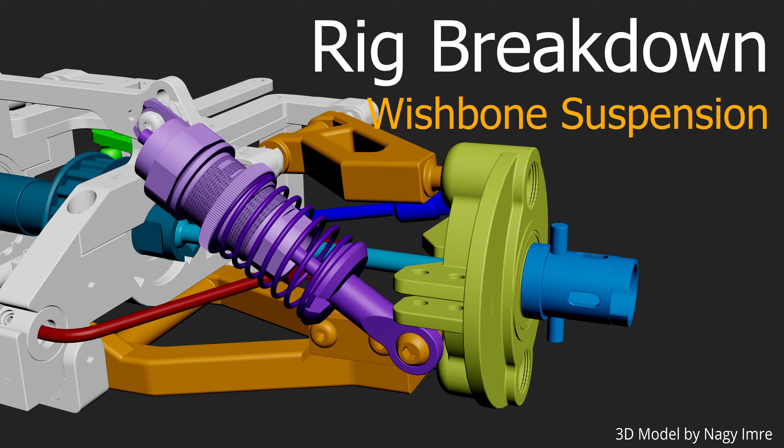Hello and welcome to the rig breakdown series, where we have an in-depth look at some of the rigs that I've made to hopefully help you guys on your way whilst rigging or sorting things out. Again, this is not a final rig, it's in no way perfect, but it hopefully shows you some of the approaches that I've used to get to the final result.

And again, there are different techniques available. If you want to use any of those, obviously be free to do so. This is just one of the approaches. There's always multiple approaches that lead to the same result or a slightly better result even. So yeah, take it with a grain of salt, but this is just my approach, and I hope it helps you.

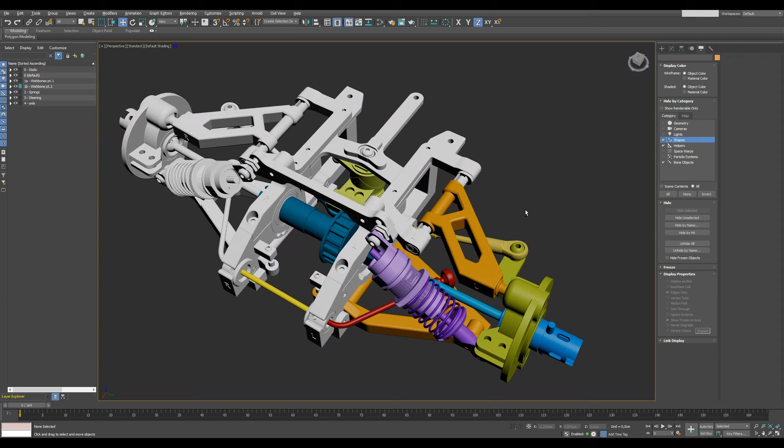So if you look at the whole system, we have a lot of stuff in white here. Those are the static parts. It is obviously the same left and right, and I'll just focus on the left side here, the part with the colors. The other side is the same. Feel free to copy that over and complete the rig if you want. But just for today, we'll be looking at the colored parts on the left side. So let's go ahead and hide the static parts. And you can see we've got a couple of categories that we'll be working our way through today.

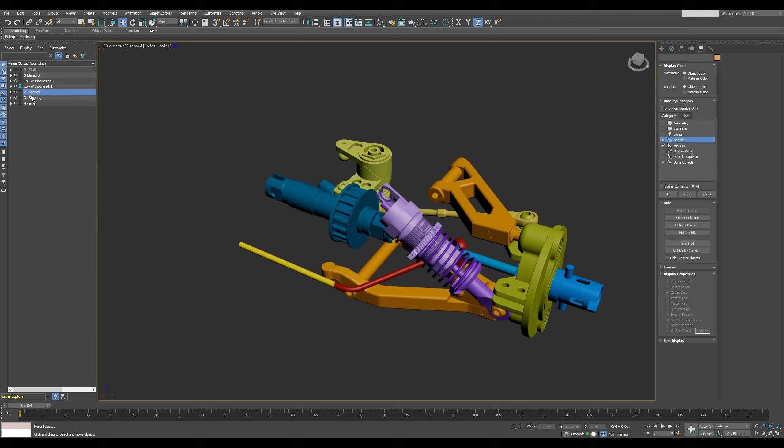And we'll start with the wishbone. There's a second part to it. We've got the spring, that's the purple area here. The steering obviously is something that we'll look at. That's these parts here. And last but not least, the axle, which has a universal joint in there. So let's hide the rest and focus on the wishbone setup that we have here. Let's show some of the shapes and helpers that we've used. Yeah, so this is it.

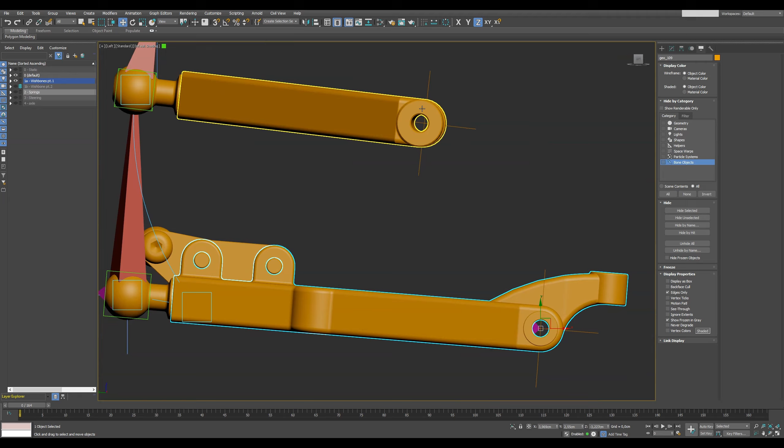If we look at it, one thing to note right off the bat is that if you see those wishbone setups, they are often not aligned with each other. Meaning that if we go to the left view and we look here, fully aligned, but this one is slightly offset. So if you want to rotate them with a simple bone setup, it wouldn't work. Or I mean, it would work, but it's not super precise. It would wobble a little bit. Again, this might be okay for you, but I just wanted to go with a really precise setup that works in all situations. So that's why I've chosen this approach.

Also, you can see that they're offset from each other a little bit. They're not straight. You can see this bone here is angled a little bit, so they're not actually 100% aligned with each other. So that adds to the complexity, I would say. So how did we do it? Let's hide the geometry. We've got one bone here. This is the control object that's just linked to this dummy here, and that just follows along. So that's a simple rotation on this axis.

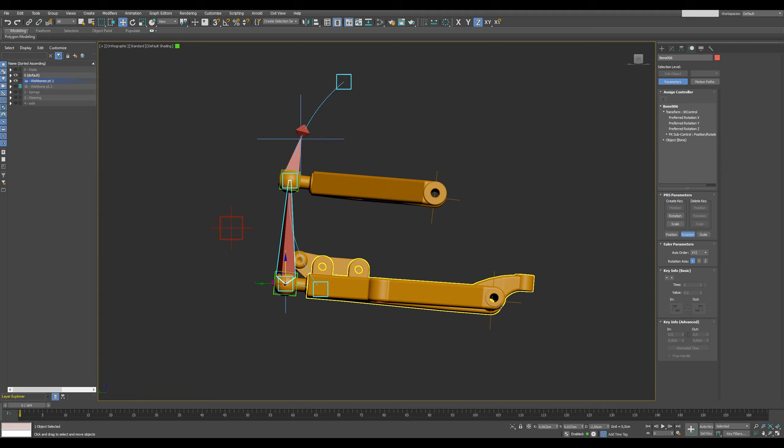And then the top part, let's unhide the geometry. The top part is also rotating on this local axis, but this has a look at constraint, sorry, not a target. And it's looking at the bones here. Now these bones are used because of the angled path here, but also because of the slight difference between the angle of these wishbone parts, which is the reason why I've drawn this circle. And this circle aligns with the center point of the top wishbone. So if we look at that rotating, you can see that it follows that arc perfectly.

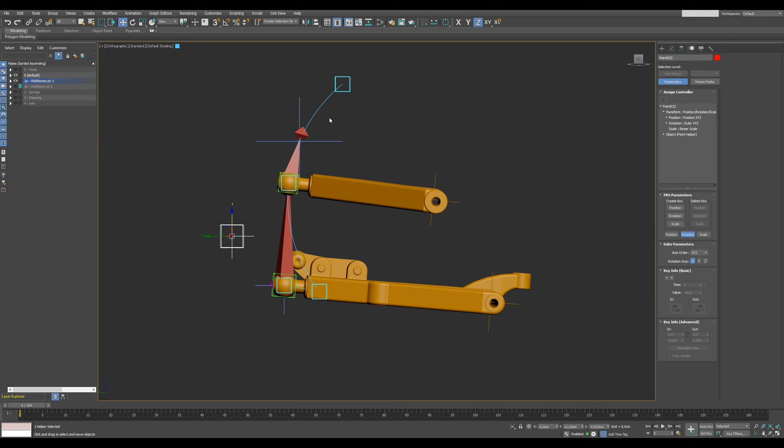And these are mounted within the chassis, so they wouldn't move, they would only rotate along their local axis. And the reason I went with the path constraint is because bones sometimes wobble a little bit and it's not super precise, like I said. So if you just draw the path, you can see I've fudged a little bit here with the angle, but that's all good. The bone doesn't really get that far, so it's never on that point unless you really skew it. You can see here. But yeah, the suspension would never go this deep. You can see that it kind of breaks the rig.

But if it stays along this axis or this path, it's fine, and it moves perfectly along each local axis. And that's very important, to not have that wobble in there, which you would otherwise have. So a fairly straightforward setup.

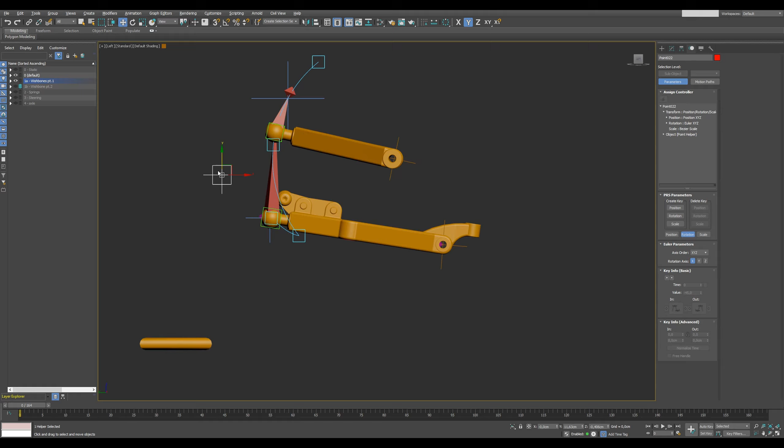One bone attached at the bottom, then a second set attached to the spline here, and if you move it along, then the top one just follows that path and the bottom one just rotates on its local axis. That's it. And then there's part 2, which is this one here.

Now this is a sort of stabilizer rod which works by twisting it, and that's why I've cut it into separate parts. Let me unhide the static. This is all one part normally. And it's probably a torsion bar of some kind, but since we only rig the left side, let's just focus on this.

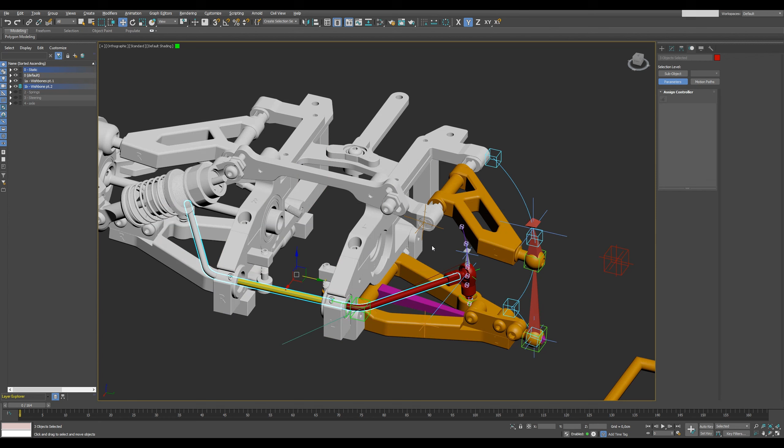Let's hide the static parts, but we don't really have torsion. So for practical reasons, I've just cut it up here, and we're only focusing on the red areas here. Let's hide the first part here. So this moves up and down. Actually, let's show that because we need this control object. So how did I do this one?

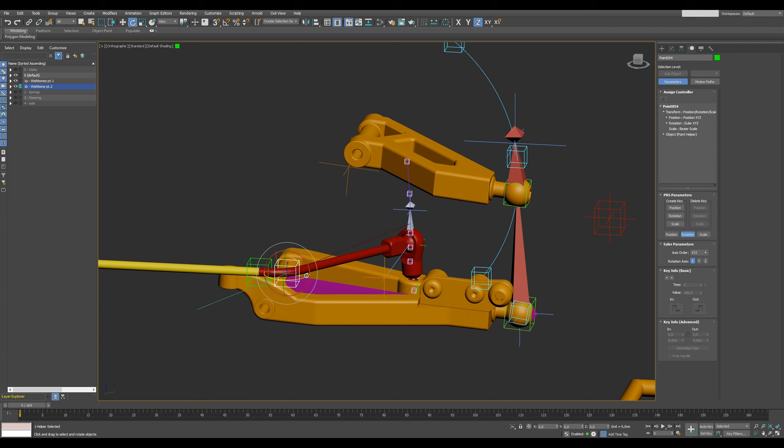Same setup. Basically, you have the arc here, which is the arc that this rod will move through when it rotates, and the rotation that it'll do is actually this one. It's all linked to each other, of course. Sorry. Let's just animate that for ease of use. Up. There we go. So now that's animated, and we can hide this part.

So again, you have this setup here. Let's hide the geometry, and you have a set of bones following along a path. Now this path is the center point of the rod here, and the rod itself rotates over the center point of this yellow one, which is obviously the same as this one.

So it's all aligned here in space. That is this point here. So this is the rotational point, and this circle here describes what the arc would be of the red areas following this path. I hope that makes sense.

So how we've done it, we have this one linked to the Wishbone part 1. That is this one here. So that's just linked to the pink or purple bone, however you want to call it. So that gets pushed upwards and it follows along this path. And this one is just a look at target, looking at the bone. Yeah, there you go. And that just describes a rotation along its local y-axis.

So that whole thing here, the whole red part, the top part at least, is linked to this look at target. So if that goes up and down, that moves along, and the rest is linked obviously to this bottom bone, so that you can see that it rotates slightly here based on the local axis. Not sure if that shows properly.

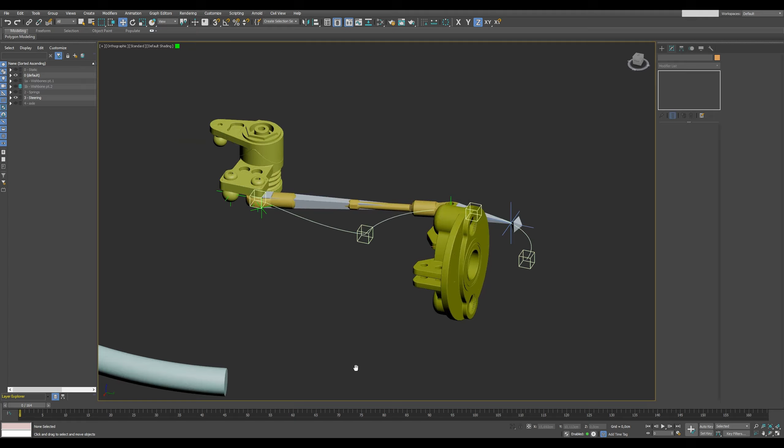Then the steering part, again, we're using spline IK here. I have linked it to this part that you can move around. Doesn't really matter, but you might as well rotate this point here. It's the same.

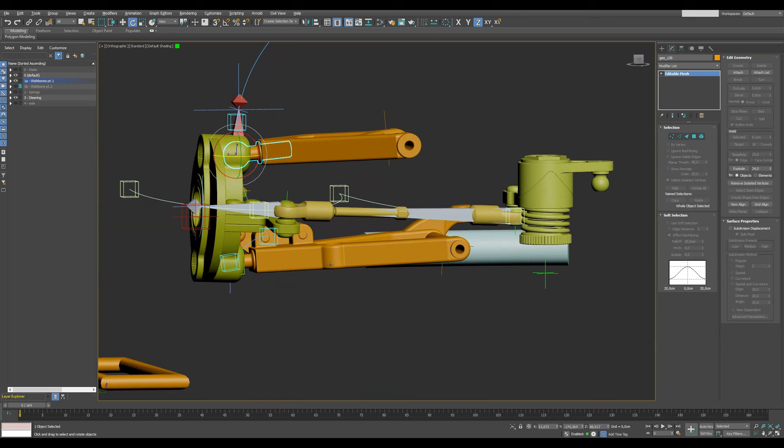But we're using the same spline IK, and the reason why we do this, if we unhide the wishbone setup, is again because these things are not straight. They're not centered. You can see the whole thing angled here. But if this moves up, then the steering obviously needs to follow. So if this goes up, we've animated that.

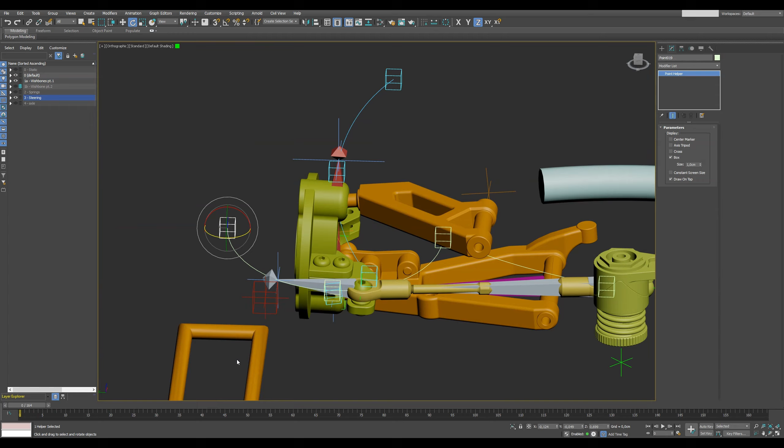So there we go. This arm of the steering needs to follow, and the suspension is leading and the steering follows. It's not vice versa. It wouldn't work. So if the suspension goes up, the steering just follows that, and you can see that the path, these points, are linked to the height difference or to the animation of the wishbone, so that just moves up and down along with it.

Let's hide this. So for looking at this, the setup is the same. You've got your same spline IK, you've got your bones that follow along the path, and if we are actually doing some steering actions, let's animate that as well. Let's say from 30 to 50-ish. Rotate this one. There you go. It's a bit extreme, but it'll work. So even though the height difference has now changed, it still works.

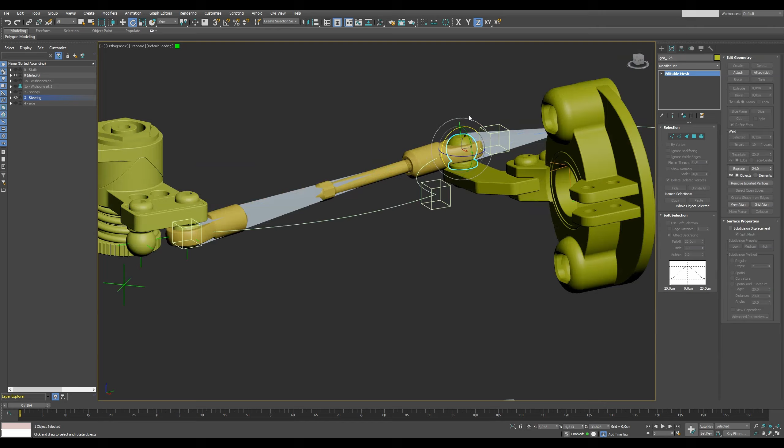And you can see that this one slides along the ball joint here. And the same thing on the bottom side. If we show it from the other side here, you have another ball joint here. Sorry, that was the one we're looking at. You've got another one here. So these are just simple bones, simple spline IK setup. The trick is to, again, draw that arc, that this part, again, attached to this ball joint and the one here in the bottom, that is rotating around. So again, that's not a vertical setup, it's slightly angled.

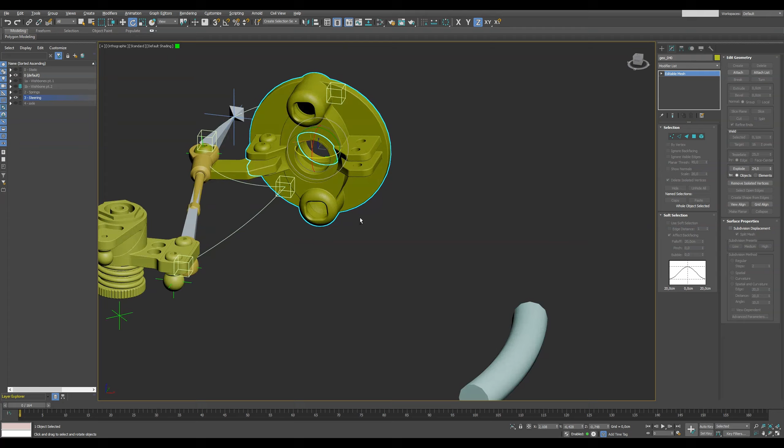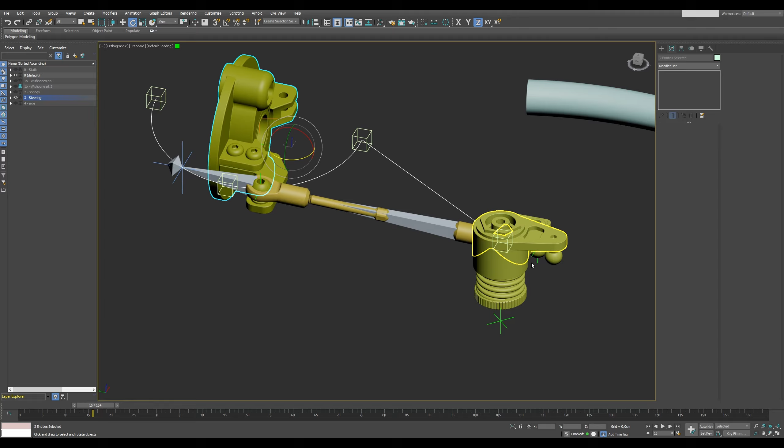So what you want to do is your path that this rotates around should have the same alignment. It's not a horizontal one, it has a slight alignment. So when it rotates, it follows this path perfectly. And that's what you want to repeat in the setup pretty much everywhere. So even though it's angled, even though it's all rotated a little bit, if you have this setup done, then you cannot go wrong because the path is always the same. It always rotates around these 2 points. So yeah, straightforward setup. This one just rotates along with it. Obviously, not a really complex one. Just like that.

Let's move to the final parts. The axle. The axle is basically a universal joint. You've got the leading one here. That's your wheel that you want to animate. You can see I've animated it. And following the tutorials that you can find on the basic rigging series that I have on my channel, you can easily animate this so that it still works even though these axes move.

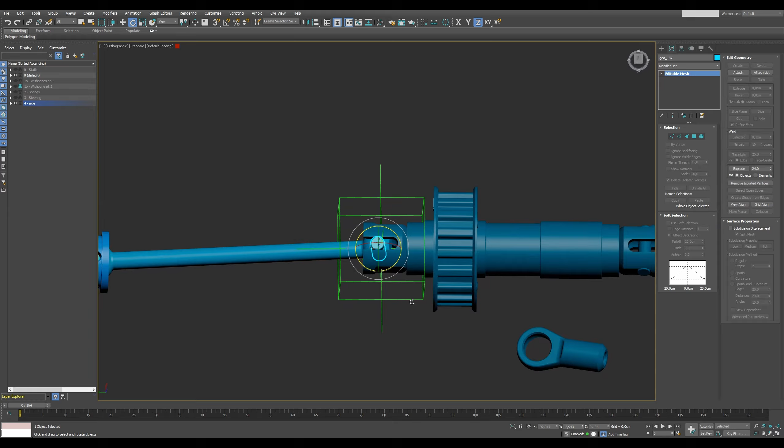It's a double universal joint in principle. So if you use this one, then this part would be your normal, your middle part that you would link with look at targets, etc. This will be your end result, but again, your end result here is your input for the second one. This would be your middle part, and then this would be your output part. So there's a bunch of dummies involved with it, but it's a fairly simple, straightforward setup that gives you the rotation of the axis.

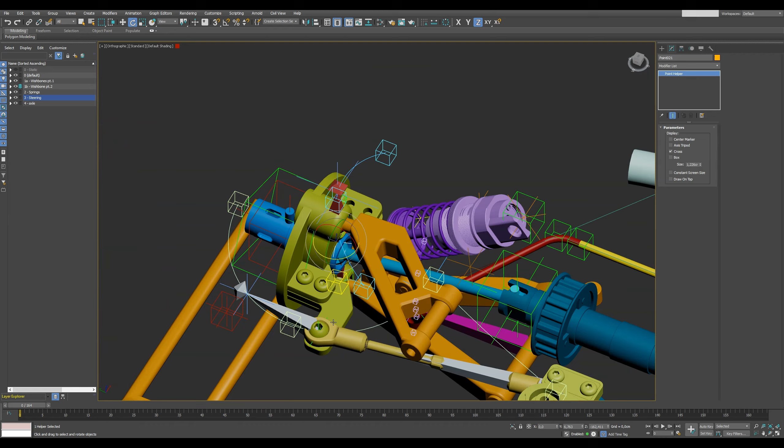Now what I usually do, the parts that I animate, I give them a red color, opposed to the green, just so that I can easily identify them. And what I normally also do is I give the look at ones an orange color, just so that I can easily identify which ones have look at targets, like for instance here on the springs.

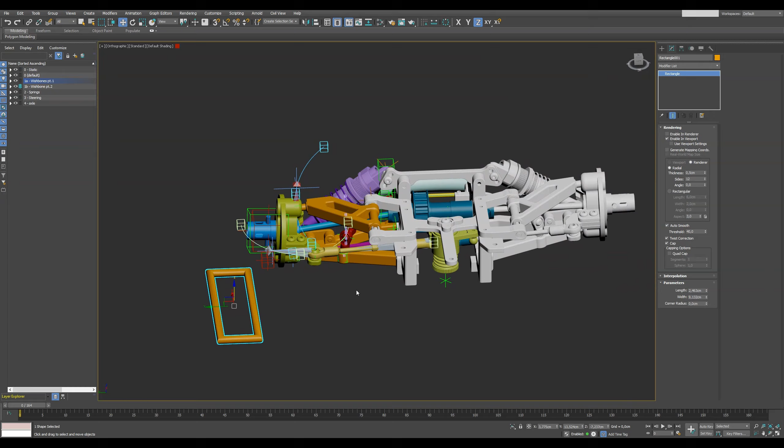So in short, there is your Wishbone suspension setup. Again, it's not perfect, it does work, but it's not a full car setup. It was for me mostly about how do I stack these with hierarchies and how do I make it so that technically it works perfectly. No wobble, no offset or anything. But if you're doing a full car setup, then it might be a little bit too much. Or if you want to go fully in depth, then this may work as well. So there you go. There you have it.